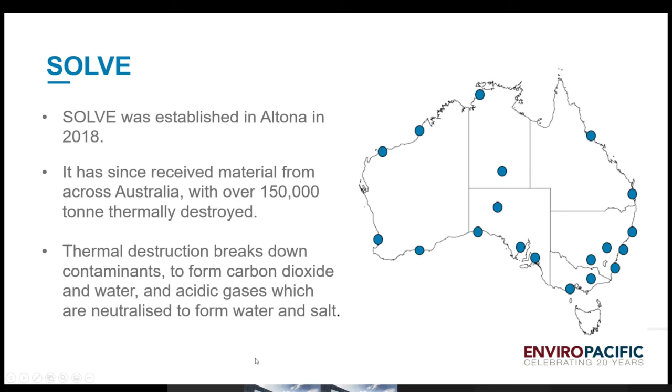PFAS. So PFAS is a very broad church, and it's an acronym for a class of fluorinated organic compounds. There's over 3,000 of these, and there's a handful that are in commercial use or have been in commercial use. Of these 3,000 PFAS chemicals, the longer chain chemicals have been found to be the most problematic and are what come to mind as being the problem or forever chemicals that are discussed in the media. These long chain PFAS are very soluble in water, but they are also very stable. There is a bit of a trend for many man-made chemicals that over time they can degrade or partially degrade, and this is not the case with the PFAS family.

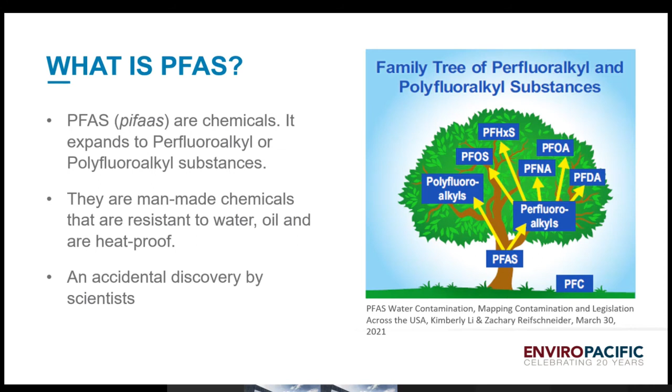They were an accidental discovery by scientists who were looking to understand adhesives and non-adhesives, and found this amazing product that had water repellent properties, was able to be used as a coating on cookware to stop things sticking. It was great for suppressing fires, and so was used broadly in many firefighting applications, in stations, in helicopters, deployment and the like. It was also very successful in being included in household materials such as sofas and mattresses and household fabrics, which allowed household fires to start to become a thing of the past.

This broad production and broad use of PFAS has meant that there is PFAS in many parts of our environment now through the production, the use, or when it is passed on to disposal. And so in entering the environment, it's taken up into the water, into plants, and into animals.

PFAS really came to the fore as a consequence of one of its manufacturing sites in America. Adjacent to this production site was a farm that had been farmed for food and livestock for quite some time, and the farmer had noticed that the cows he was raising had started to become ill. He started to investigate a little further and discovered that what was causing his animals to be sick was that they had been eating food and drinking water which had been the recipient of a lot of wastes associated with the local PFAS production plant.

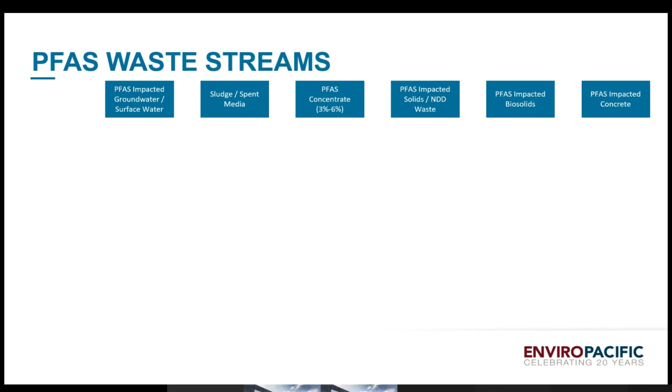So if we dive into PFAS impacted groundwater and surface water, Enviropacific, for example, can do a water treatment plant, and the water produced as part of the treatment system is potable drinking water. So it completely separates the PFAS, and then what's created is a sludge or a spent GAC where the material is concentrated. So this spent media actually needs a disposal pathway as well. It can either go straight to a landfill, or it can go in for chemical immobilization or for thermal treatment.

With chemical immobilization, it can go into a landfill, or it can go in an on-site containment cell, or it can also be reused. But with thermal treatment, all the material is able to be reused, and the risk of the PFAS sitting there is completely eliminated. For PFAS concentrates, we've found that the most cost-effective solution is to send this in for thermal treatment. It's a bit strenuous on water treatment systems.

For PFAS impacted soils and NDDs, again, you've got the option of either immobilizing on site if you are content with lowering your PFAS risk, but if you want to completely eliminate it, and depending on the concentrations that you have, thermal treatment becomes a viable alternative. In terms of pricing, it's quite similar as well. PFAS impacted biosolids is also something that we're seeing a lot more prevalent these days with water authorities. Again, this can either be chemically immobilized or sent for thermal treatment itself.

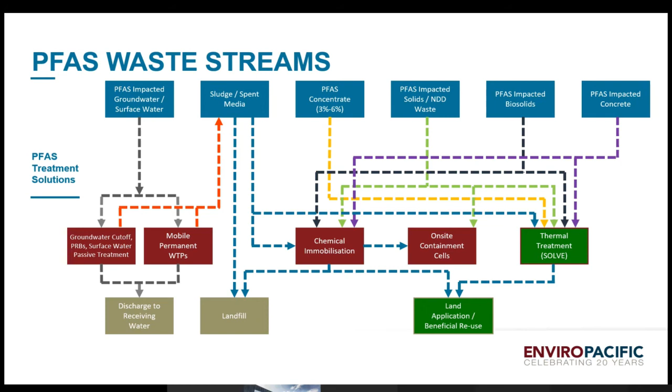And then finally, impacted concretes with PFAS. PFAS is very mobile and concrete is quite porous, so we found that the concrete is readily absorbing the PFAS. This concrete gets crushed at Solve and thermally treated, and we've been able to reuse this concrete as well.

So PFAS treatment at Solve. When Solve first went down the path of getting approvals to operate, PFAS wasn't even a contaminant of concern, and one that people hadn't even heard about. The facility was designed to treat contaminated soils, but has since evolved to treat a wider range of materials, which includes PFAS.

So PFAS being everywhere and so apparent, we've had to go through field trials to have a look at the effect of thermal on the different forms that it comes in. And what we can say is at Solve, we've successfully demonstrated that the handling, the treatment, and the validation of PFAS through the thermal plant is completely successful.

So if we go into the thermal process in a bit more detail now, we're able to separate the process into two paths, the soil path and the gas path. If we start with the soil phase, in our pre-treatment building, the PTB there, we crush, screen, blend material to get it ready for treatment. From there, the loader you see there will put the material into what we call our hopper, and then that will go into our rotary dryer.

So this is treating contaminated soils or solids at a rate of up to 35 tonne an hour. It's sitting rotating at 7 to 8 RPM, and the soil's heating up to 550 degrees Celsius. What this is doing is desorbing the organic contaminants out of the solid matrix. The soils and other solids will sit in here for up to 15 minutes, 10 to 15 generally, depending on the concentration.

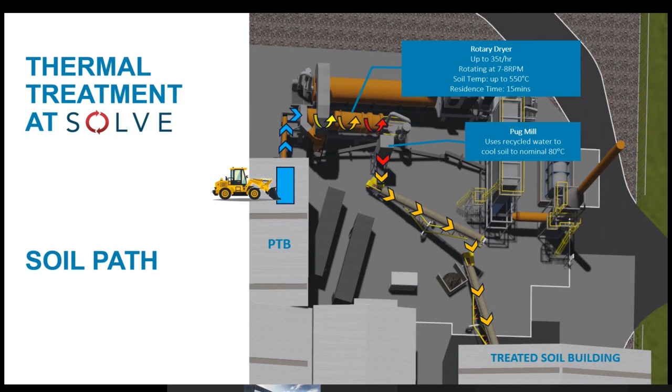And then we use treated water from our wastewater treatment plant, where we use a pug mill to rehydrate and cool this soil. And then we convey it into our treated soil building, where it undergoes testing and further validation to confirm that it's clean before it goes off for its next use.

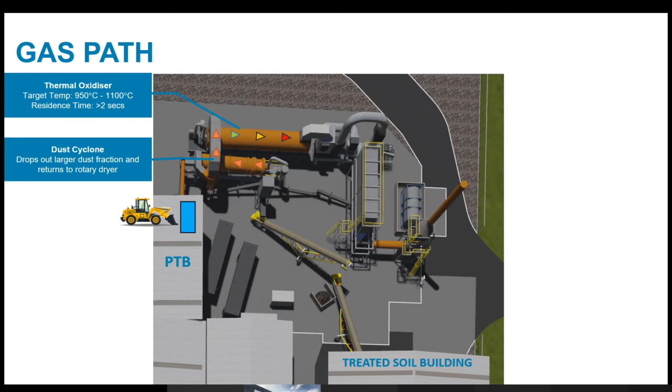The oxidizer heats the contaminated gases further up to 1100 degrees, and that's completely destroying the contaminants back to their base forms. We then go through 2 stages of heat exchangers, for 2 reasons. The next stage with the yellow scaffolding around is the bag house. That has a number of fabric filter bags. If the temperature's too hot, they catch on fire, which is not good.

And the second reason is the formation of dioxins and furans through the de novo synthesis phenomenon. By quenching this gas down from 1100 down to 190, you stop the formation of that. The next stage is the bag house. The bag house is there to filter the minute particulates that are in the gas phase, up to 75 micron.

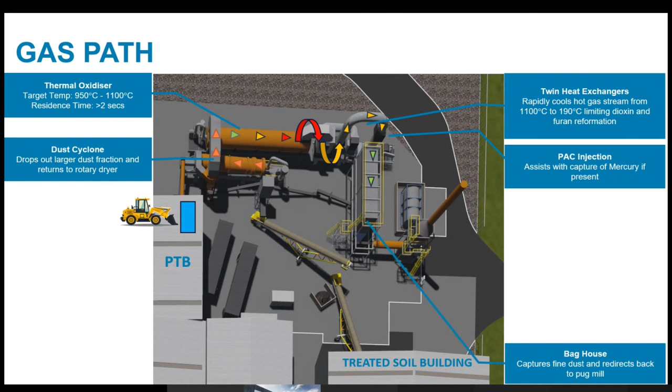And then the next stage is to scrub any acid gases in the gas stream using a liquid scrubber, a packed bed scrubber. The acid gases rise from the bottom. We use caustic to neutralize from about halfway, and we neutralize this gas as it leaves. So what's produced from our stack is predominantly carbon dioxide and water in steam.

We've got a continuous emissions monitoring system that's 24/7 online as well. It's all hardwired into our control room, and it's set at 70% of what our license conditions are. So if it gets even close to what our license is, it tells the control room, do something about it, reduce feed, stop feed, whatever you have to do. If it gets to a high level, it will stop the plant. So that's how the plant works.

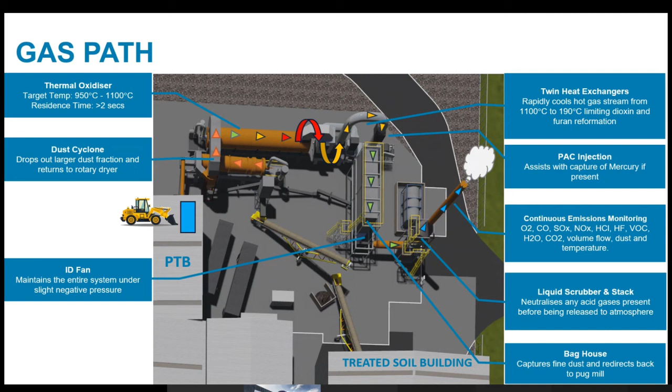In terms of chemical reactions, and if we talk about PFAS here, there's three main isomers of the molecule that the EPA heavily regulates. So it's the PFOS, the PFOA, and the PFHxS. So all these isomers are pretty similar in terms of their chemical composition. And then once you hit that with thermal desorption, what gets produced is carbon dioxide, hydrofluoric acid, and water.

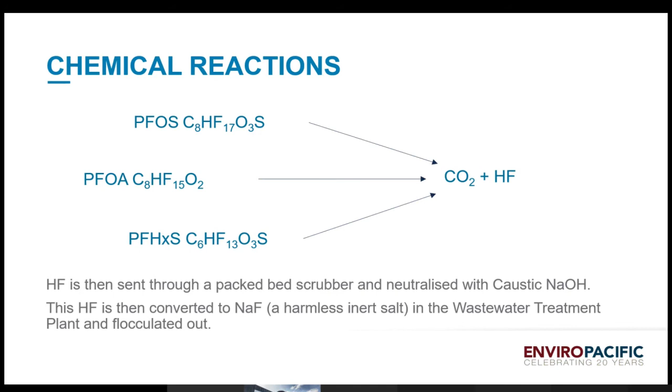So hydrofluoric acid is a nasty chemical, but it's sent through the packed bed scrubber through the process and neutralized with caustic, which is sodium hydroxide. What this does is it converts the hydrogen fluoride into a harmless inert salt called sodium fluoride. We actually flocculate this out in the wastewater treatment plant as a harmless inert salt. So essentially what you've done is you've taken a nasty PFAS molecule, and by the end of the process, what you're left with is a salt. So that's how we deal with PFAS.

So the field trials that we have completed on site are really for us to get a better understanding of how those materials interface with our materials handling processes. We know that once the material is presented to the thermal treatment pathway, it can make its way through and will be successfully destroyed. So the broader range of media that we have received and processed to date has included spent resins and ion exchange resins from a very large range of different water treatment plants.

Soil is our main volume that we treat, and soil again is a very broad definition. That's any building materials, construction materials, anything that was originally from the ground tends to make its way into soil, being also concrete, bricks, tiles, and being that a lot of contamination is from brownfield sites, we also get scraps of timber, some metal, and any other bits and pieces that you might normally find with an excavation of a brownfield site. Hence the reason why we do spend so much time pre-treating and sifting to ensure we can remove those items.

Firefighting testing, training, and actual events means that there are PFAS concentrates in a liquid form that also make their way to site, and it can be introduced to a soil host to make its way through the thermal treatment plants. And we have also received biosolids. And again, it's about understanding how do we combine it with what materials so it can make its way through the material handling equipment that we have on site. What we have found from these trials is that regardless of what that host media is, once the PFAS is in the gas stream, we know that we can successfully destroy it in the oxidizer.

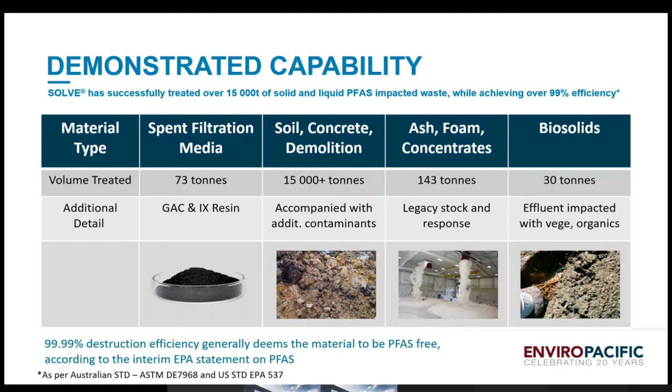So once people have found PFAS on their project site, we'd like to think that the next couple of steps can be resolved in consultation with the tools and services that we're able to offer at Enviropacific. That can be from winning the material and helping contain it on site, recovering it, transporting it. Of course, others can do that. We have received material from every mainland state of Australia, so we understand how to navigate the different state regulators in taking material across borders. All our material runs over a third-party certified weighbridge. It is stored in an environmentally controlled system.

Our pre-treatment can take more than one attempt to get it right because we get such a variety of materials and we are the end of the line. So we have to make it work, and we've got many people who understand how to blend, treat and change the materials to come together so it will work from a materials handling perspective. Our treatment is verified to be effective because of some of the minimums that we have in place around operating temperatures, maximums that we have around emissions monitoring, and all the material that comes into the treated material shed is sampled and sent off-site for testing before it is then able to be classified and then taken off-site for either reuse or some people want to use it for incorporation into some structures as well.

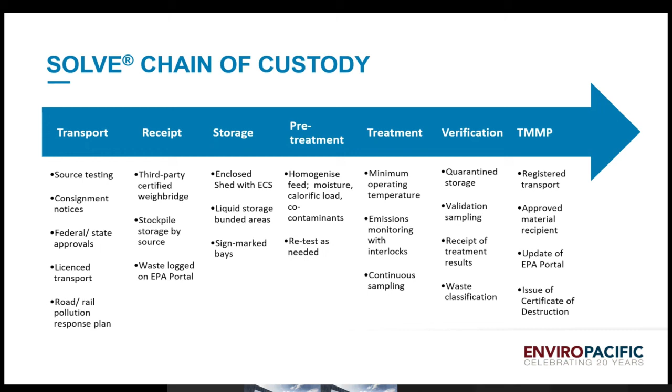So at the moment, we have a broad range of materials that we can receive for thermal treatment, and it's not just PFAS, it is often found with co-contaminants, and this is another factor that is considered as part of the blending process. And we are partway through the installation of a drill mud plant on site, so I think they've just stopped for lunch, hence there's not much noise at the moment, but in a couple of months we will be receiving non-destructive drill muds also for washing. We can take dirty drill muds for receipt, washing and treatment.

We'll now start to move into some of the questions that we've received during the sign up or online. One of the questions was around PFAS slurry. Depending on what the liquid-solids combination is, at the moment we can receive some slurries, and in the future, once the NDD plant is up and running, we'll be able to receive a PFAS slurry which is more liquid than solid for the current arrangement.

There's a question here comparing off-site disposal to on-site immobilisation. Dino, do you want to have a talk to that one? Yeah, for sure. So off-site disposal, such as sending it to a thermal plant, compared to on-site immobilisation, from a cost point of view, it's quite comparative. The difference there is obviously having to transport the waste versus the actual desire to eliminate the PFAS risk or to just lower it by immobilising. So it really depends on your desire. But from a commercial point of view, it's quite similar. There is a bit of a difference from the risk elimination point of view.